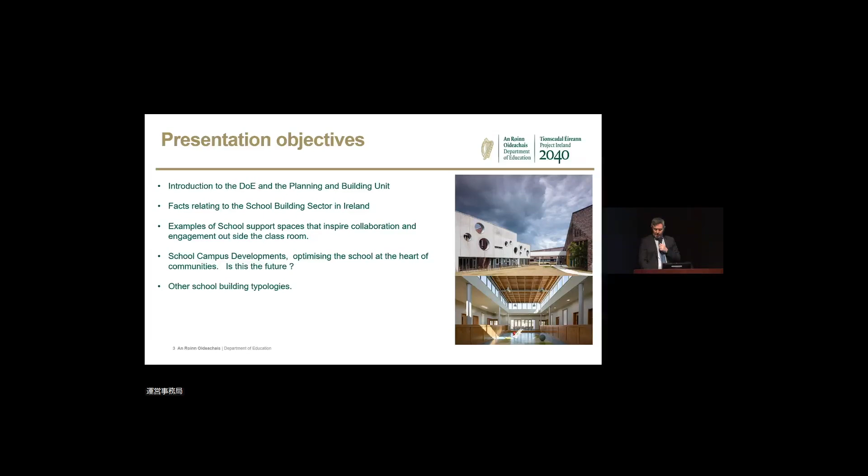Today's presentation's aim is an introduction to the Planning and Building Unit in Ireland and some facts relating to the school building sector, giving you insight and examples of some of these school projects. We have some statistics we covered a few moments ago, and the Planning and Building Unit is in the Department of Education.

Here we have an excess of 240 people, and there are many strands including site acquisitions, project appraisal, programme delivery, grant schemes and technical guidance, all supporting the Department of Education on its mission statement.

We have over 4,000 school buildings, of which over 3,000 are at primary school level, and we are adding to this greatly every year. For example, we completed almost 900 school projects between 2018 and 2022.

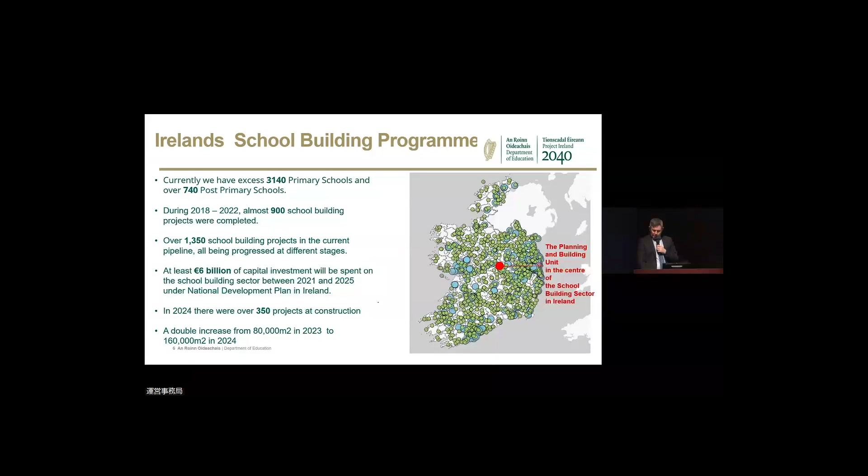We currently have over 1,350 school projects in design, and in 2024 we had over 350 projects in construction. This is all supported by at least a €6 billion investment from 2021 to 2025, and last year our budget exceeded €1.4 billion, almost double what we had a number of years ago.

The Department of Education Technical Unit forms part of the Planning and Building Unit, and it is very much at the heart of designs and projects located all over the country.

We have in excess of 40 team members in multidisciplinary teams, including architects, engineers, quantity surveyors, and recently building maintenance managers, supported by a digital team, and we support administration colleagues.

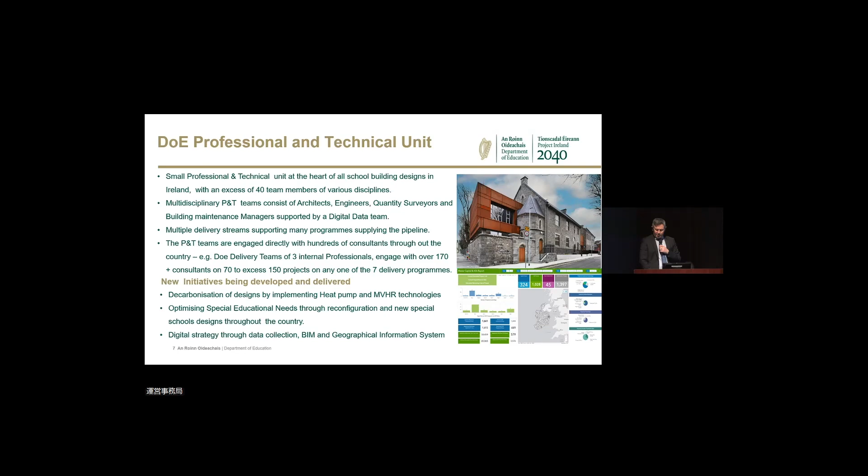To put this into context, a multidisciplinary team on one of 7 main delivery programmes may consist of 3 internal professionals engaged directly with over 170 consultants possibly, and the number of projects in a programme can vary into the hundreds. A large-scale capital programme can have over 150 projects, of which you will see many examples of school projects across the programmes.

Today we wish to show you some examples of the quality designs of architects and teams' completed projects, mainly large-scale projects, of which we have in the region of over 500 at various stages within the different delivery programmes.

As time is limited, we have picked spaces that inspire collaboration, meaning spaces to promote opportunity among students, teachers, staff, visitors, and even local community members from time to time to engage.

We have focused mainly on post-primary schools, and we wish for you to take away the quality of the spaces, the variety of design approaches, and the potential use of spaces that the school can utilise at both micro and macro level, all promoting engagement in a time post the coronavirus, which is key to today's symposium.

To start, in the Planning and Building Unit, we have design guidelines published for consultants. It's a suite of documents providing standards and design criteria for all school building types.

One key area we are focusing on today is to provide examples of a variety of design responses for the provision of the general purpose area. This area is promoted to be the heart of the school, and it needs to be flexible, adaptable, and really promote engagement, interaction, and overall space for collaboration.

It can be utilised for assemblies, student prize giving, plays, exhibitions, social events, etc. Recently we are exploring how designs can also locate this space with direct linkages to a multi-purpose area or sports hall. So I wish to present to you a few examples.

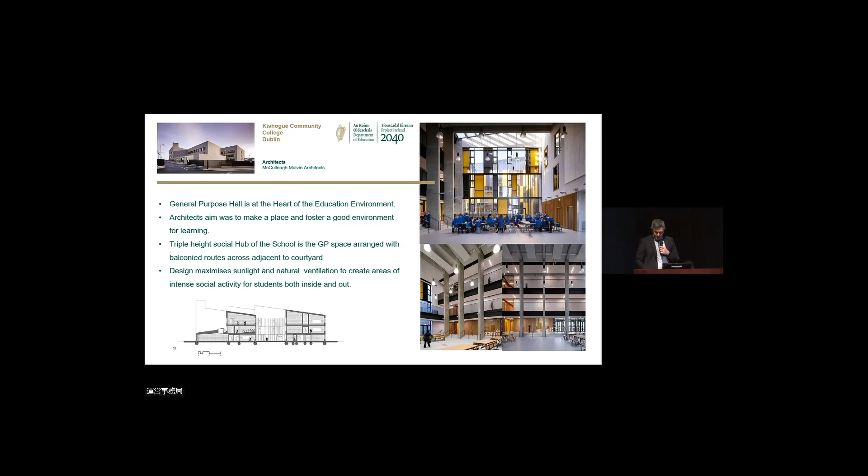The next example is a school in the Midlands, completed in 2023. This school was part of an architectural competition. It's located in a parkland setting, with a general purpose space that is well proportioned, optimising the light with direct access to the parkland.

The design also promotes additional recreation spaces at the corners of the building for use by students, as they are orientated around a central courtyard. The landscaped courtyard is a key driver to successful design, and its large multi-purpose space is the same.

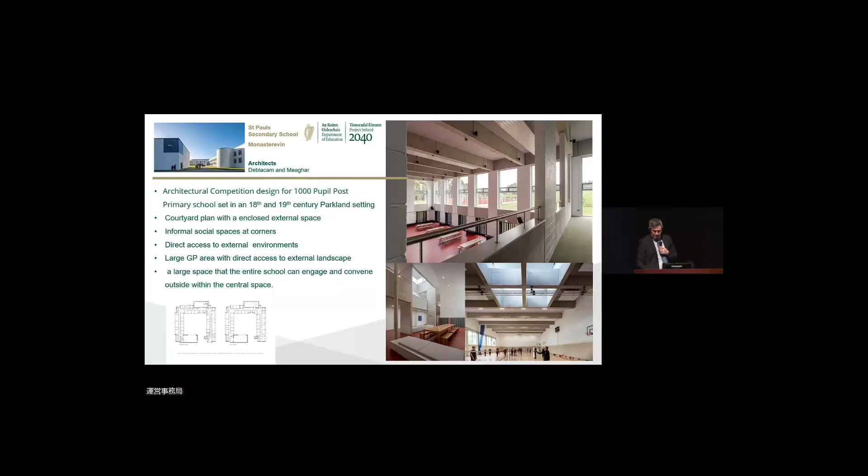The next school is in Naas, County Kildare. It is also a competition design, where two wings and a sports hall are arranged around a GP area. It incorporates tiered seating to promote space for collaboration. The design of classroom wings is also supported by provision of spaces with soft furnishings and seating located around the school for the users.

Our next school, completed recently in Limerick City, builds again on a double-height GP area and separate large multi-purpose room. However, in this design, it includes a circulation spine connecting a series of educational support spaces on the first floor. The circulation is external and provides elevated views to the courtyards and the park, while the students get the benefit of the external environment.

This example in Kilkenny City combines many successful attributes. The triple-height atrium space connects 4 wings, provides great access to the external landscaping areas, and is also connected to horizontal circulation support spaces such as the library.

The tiered seating will be sure to be a great success once this space is completed. It is currently in construction.

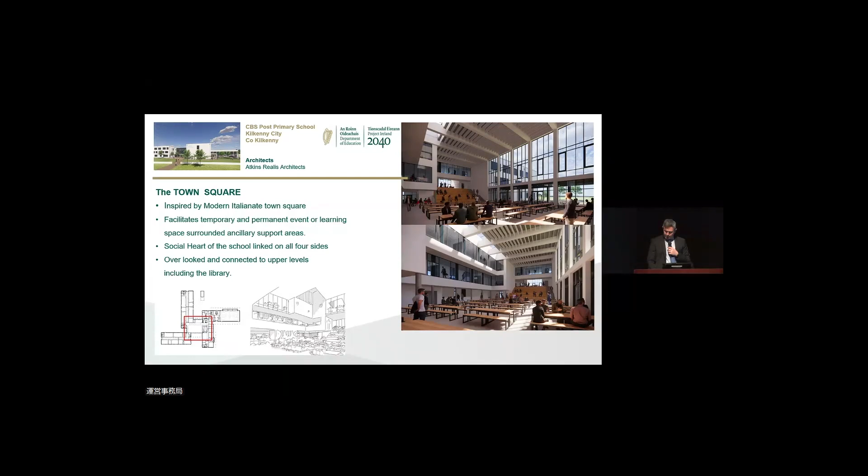The next school example pushes the design approach slightly further, as the GP area is connected to the multi-purpose room, separated by large sliding walls. Its aim is to optimise the use of both spaces. It really opens up further use of this space for the local community, particularly for activities outside school hours.

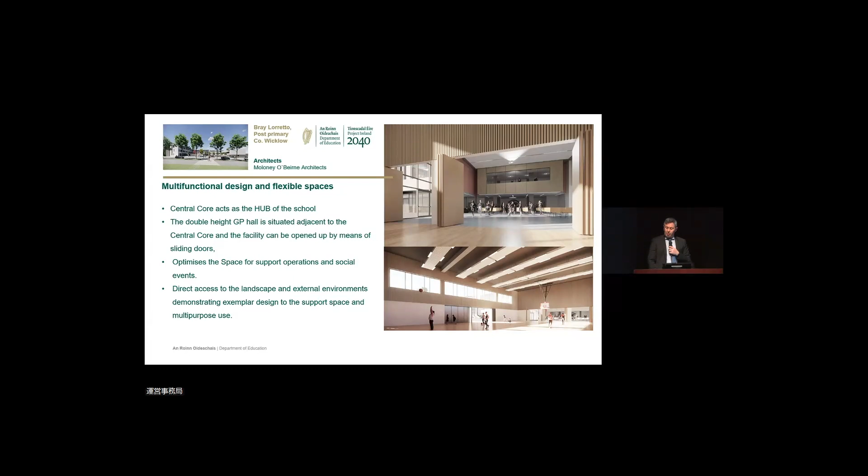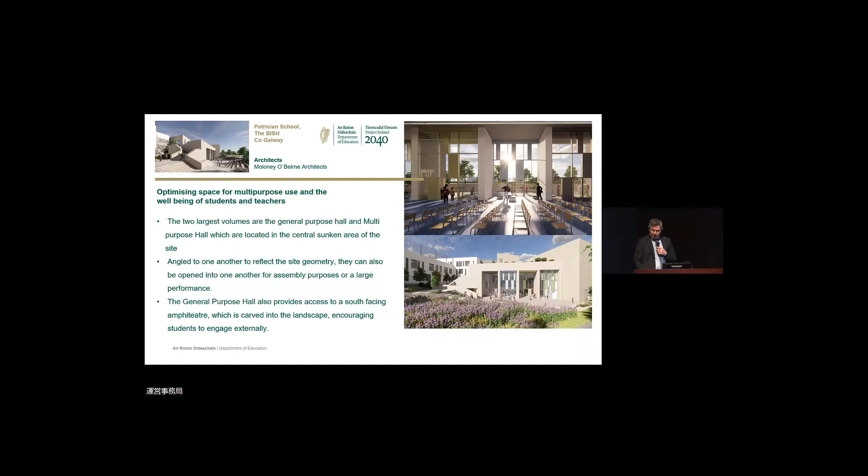The next space builds upon this again, and the same architects have built an approach linking the spaces to an external amphitheatre. The landscape amphitheatre provides further opportunities to congregate and respond successfully, as the stepped site again provides further spaces for engagement outside the classroom.

Now we're moving on to campus projects. We feel that these projects demonstrate collaboration, the sense of schools coming together, providing a strong nucleus and opportunity for communities and surrounding areas. This is an example of an educational project that consists of a post-primary and 2 primary schools, incorporates special needs, and is very much a key catalyst to public infrastructure in the local area.

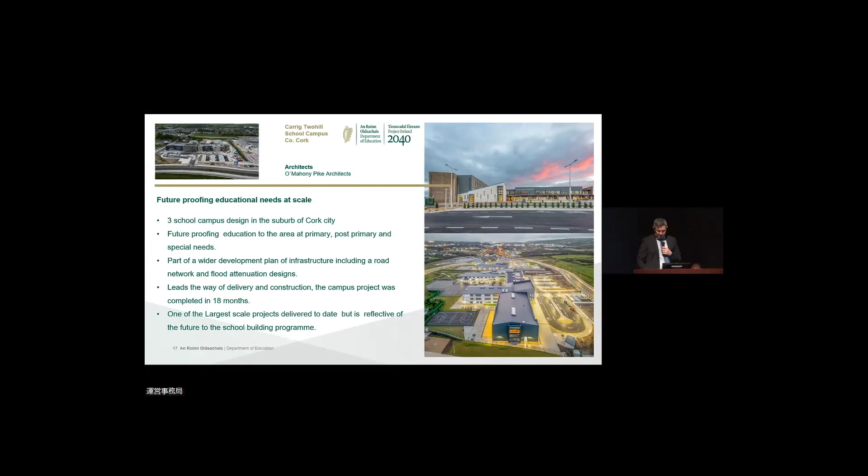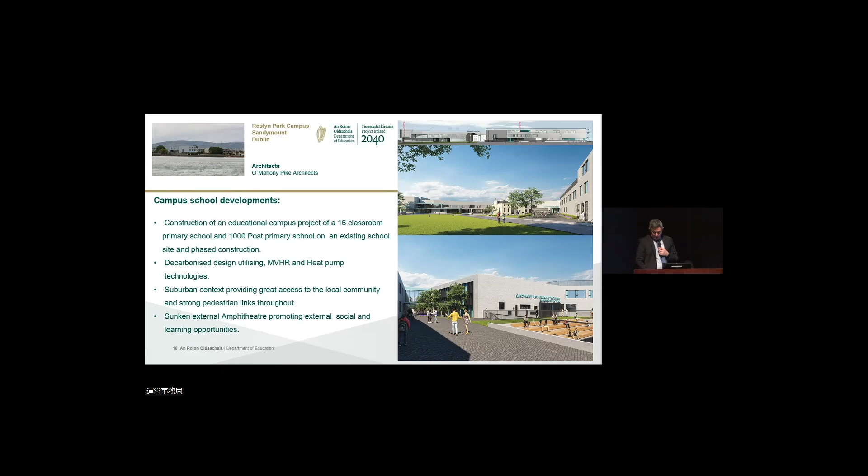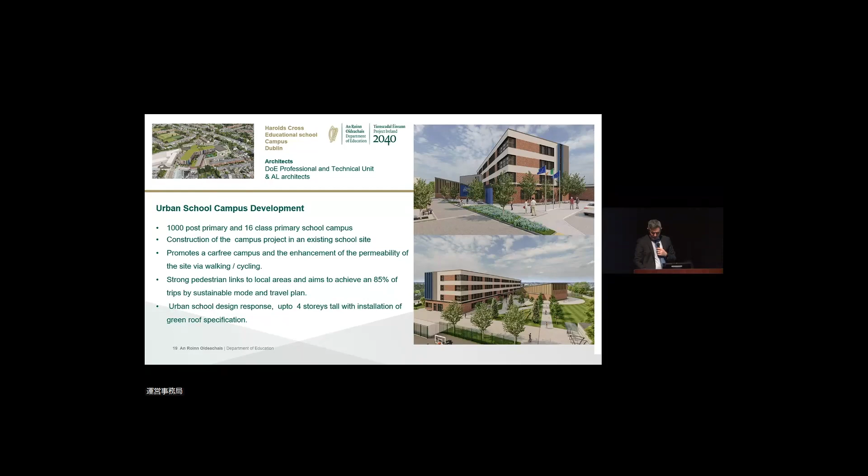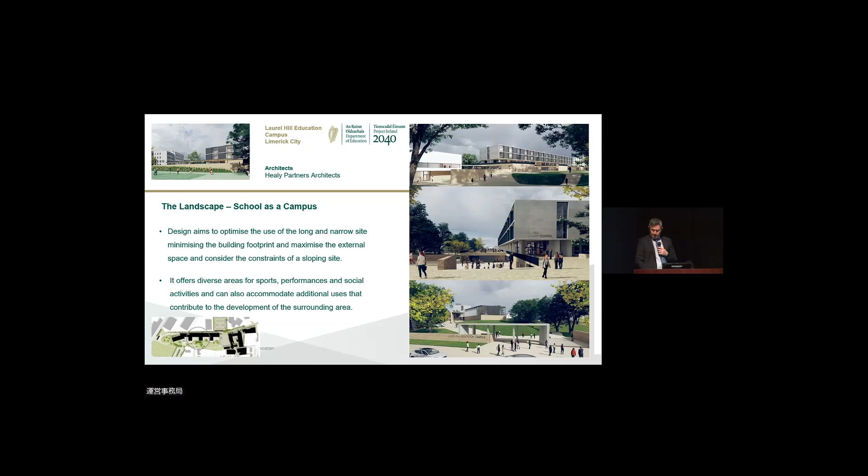Our last campus project, Laurel Hill, is currently in design stages. The design response illustrates how the architects have successfully created a merging of landscaping and educational buildings, with provision of a sports ground, in a very successful response on a narrow and challenging site with historical linkages and buildings.

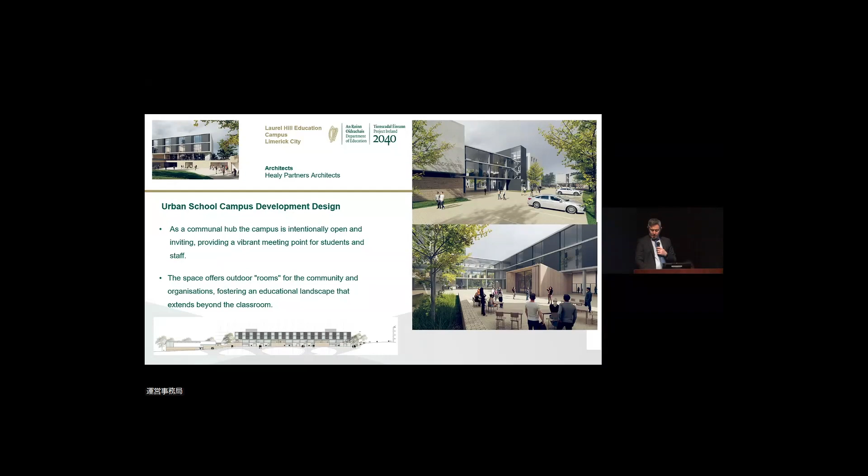The architects are aiming to create a campus that will react as a communal hub, designed intentionally to be open and inviting. These spaces will be a great addition for the community on completion in a number of years, fostering an educational campus within the city centre of Limerick.

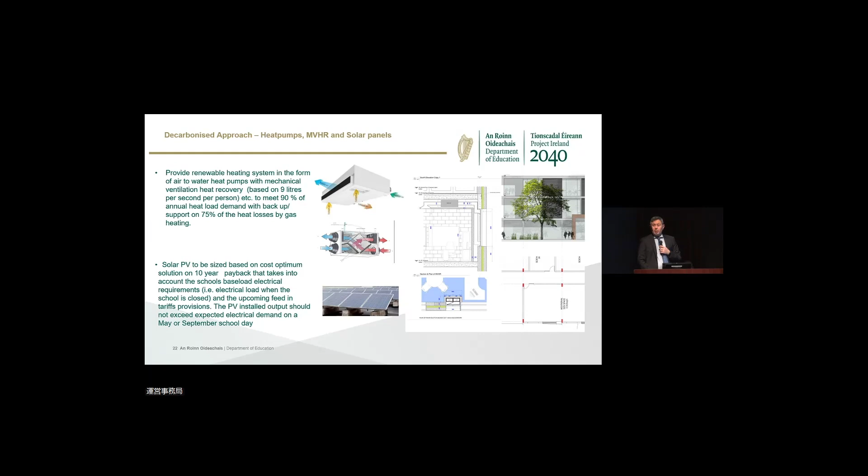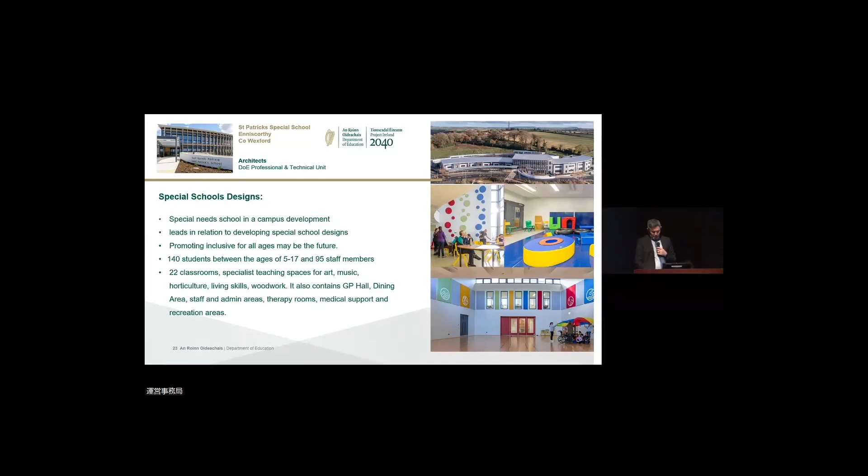As you can see here, this is an example of where we also bring collaboration for students outside the classroom, and this is an area that we will continue to strengthen and optimise going forward as we explore this even further.

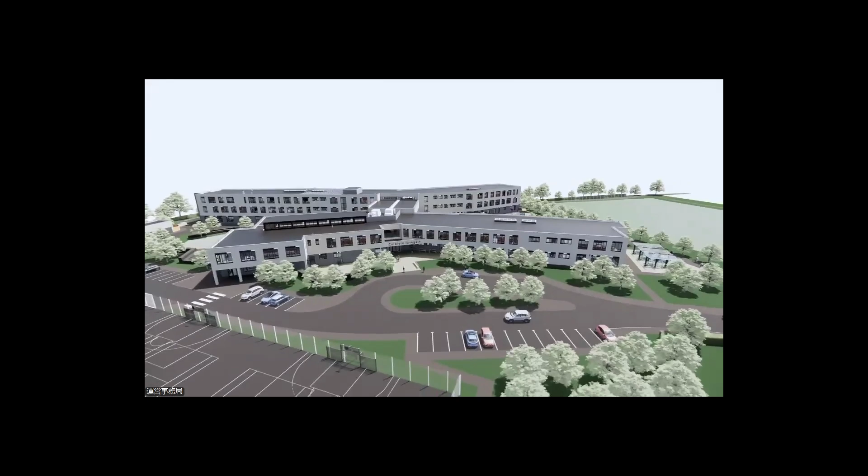So this project is on a semi-rural site in a town called Portarlington, about an hour from Dublin. 1,300 pupils, as I say. It has two spines, you can see. So the design concept is a 2-storey and 3-storey, linked by a central block, and courtyards between them, which give protection from the weather. So landscaping and biodiversity is a very important part of our design.

And you can see here just some of the external teaching spaces and recreational spaces for the pupils. And you can see, for instance, the solar panels on the roof, and the way that the courtyards protect the pupils. So as you come round here as well, you can see the coloured area is the special educational needs dedicated physical area.

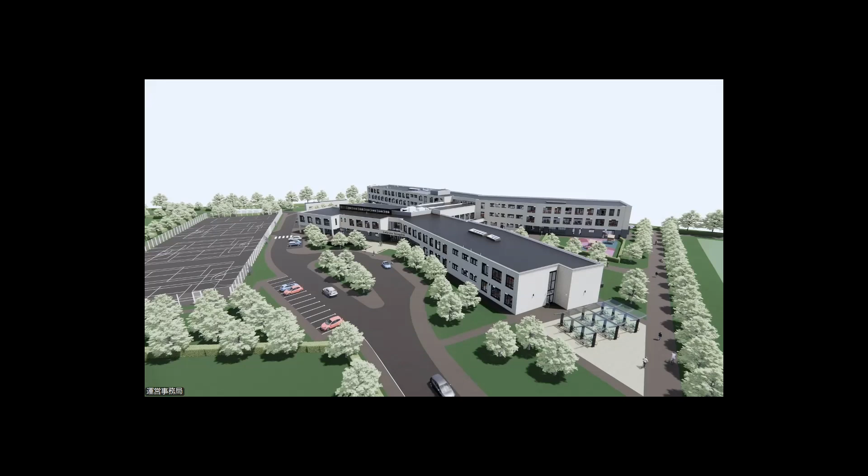The integration of special needs into mainstream schools is very much a policy with the Department of Education, and inclusivity and diversity is very important. So this model was built using BIM and Revit, and we have a process of digitalization of our projects.

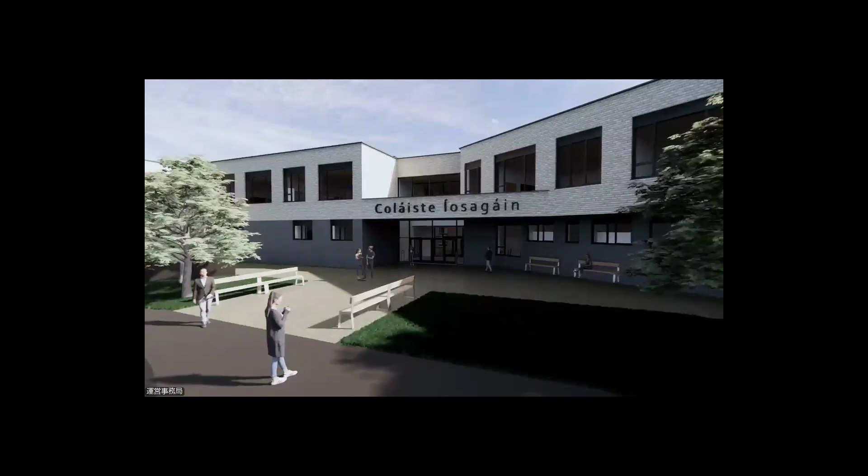So now we're going to go into the building. So this is the main entrance. We promote active travel and arriving by bike. So you come into the main entrance. It's very well signaled, but at the same time safe and secure. So there's a control point, and you come straight into the heart of the schools.

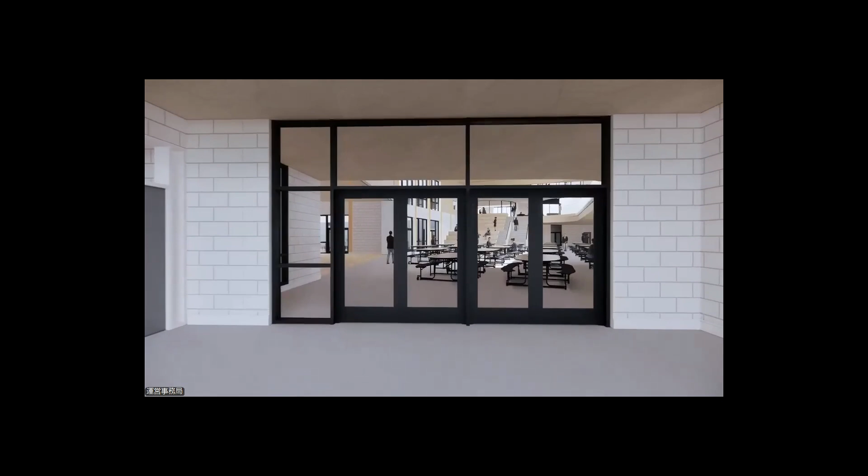This is what we call the general purpose dining area, and that connects over here to the PE multi-purpose hall. Another feature of this space is the use of glulam structure, and the whole question of sustainable design, low embodied carbon materials is very much part of what we do. And you can see the quality of the daylight.

So this space is also available to the community, and you can see the folding partitions, so the space can be closed down from the other space. So we'll come back out here now into the central space.

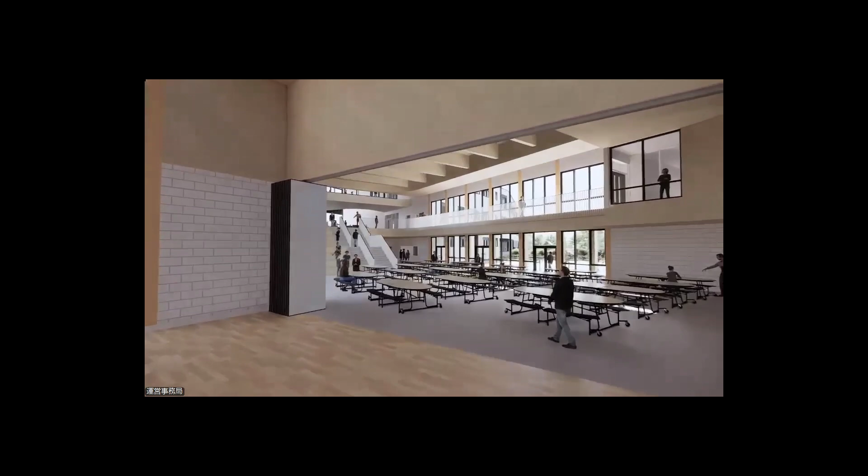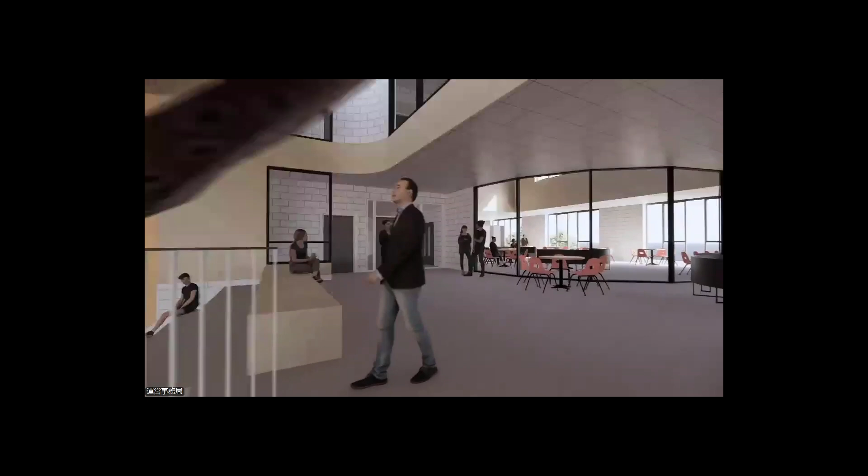So this is very much about creating a stimulating and inspiring space for the students, and a space to collaborate and have creative learning. You can see the tiered seating, which allows teachers and students to interact in a more informal way. And then you come up to this space, this is what we would call a breakout or social space. Again, it promotes collaborative learning and social interaction.

Then you have the spines. We're going to move down the corridors. So obviously the quality of the daylight and materials and colour in these spaces is important, but at the same time they need to be functional and durable and cost effective.

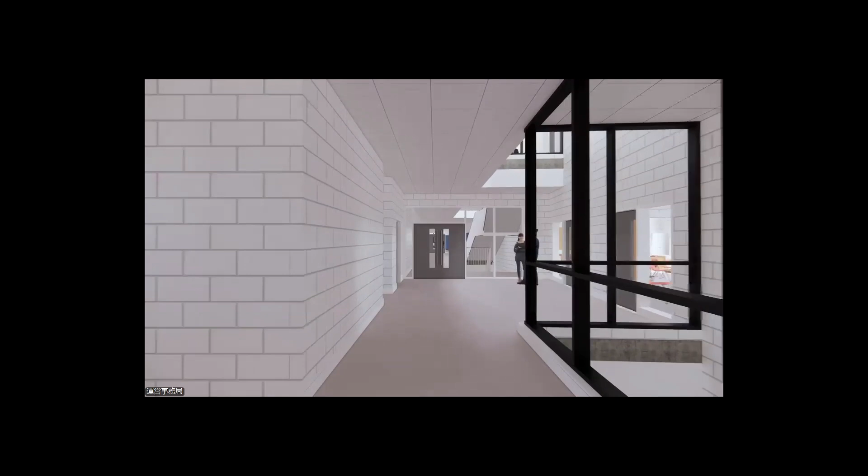And you can see the voids which bring light down to the lower spaces, and also the glimpses into the classrooms, providing passive supervision. So then we'll go up the stairs up to the upper level, and again you can see the connection with the vertical spaces bringing light down below.

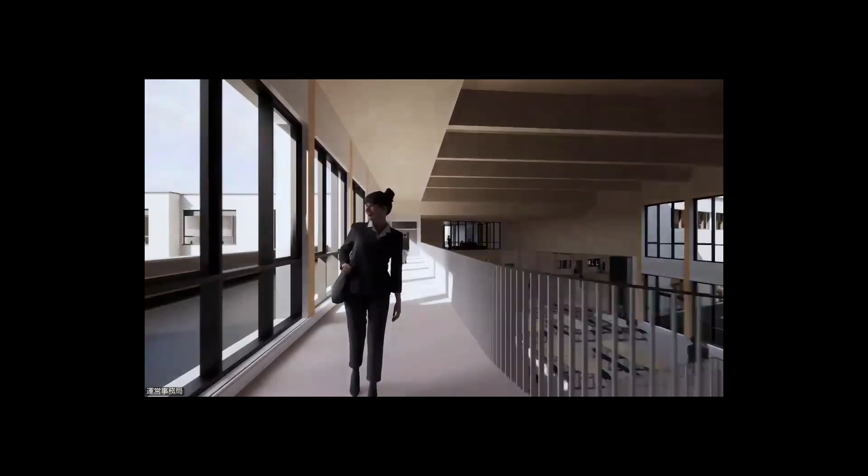This is a gallery link back across that central spine, looking down into the central space. That really orientates everybody in the school to the central space, and it's a very dynamic and open and welcoming space.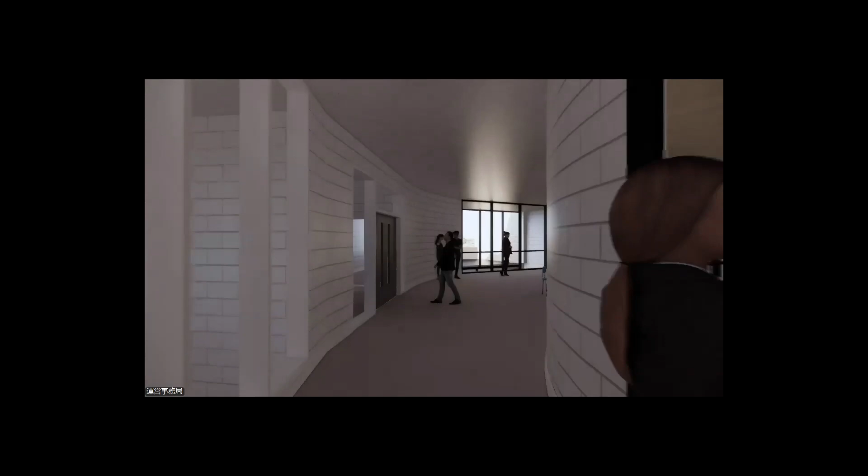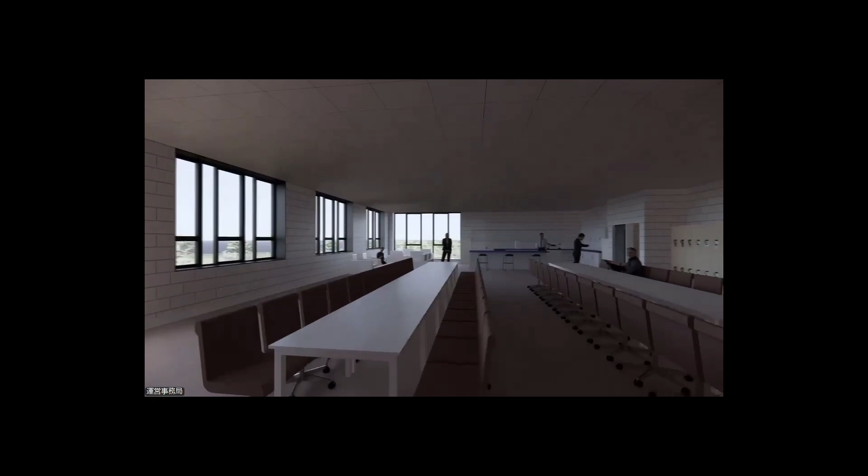Again, coming back up into another collaborative area, and you can see the use of laptops and IT technology is very important. This is the staff room, where the staff can work but also have relaxation. It's a bit of an area for their refuge, but at the same time they have connection. They can also work in their pastoral offices and also in the classrooms.

You can see the connection back down to the double height space, so everything is orientated around that. In our school designs we also prioritize all the performance standards in terms of acoustics and thermal performance, and these are all given in our school design guidance.

I went through that very quickly because the time is short, but I look forward to discussing it a bit more later on. So thank you very much.

Konnichiwa. My name is Tony Sheppard. I'm an architect. I was a technical manager in the planning and building unit up until nearly 3 years ago. I also had the privilege and honour of being the chair of the group of national experts in the OECD.

I'd like to talk in the next few minutes about this design competition which we had in 2015 and the evolution of the brief for that concept. But I believe the most influential architect in my mind on educational design in the 20th century has been Herman Hertzberger, and you can see a statement he made at one of our OECD events there.

I won't read it, you have it in translation. But moving from that, as an architect, I worked very closely with educationalists within the Department of Education on comparing a standard classroom with innovation worldwide.

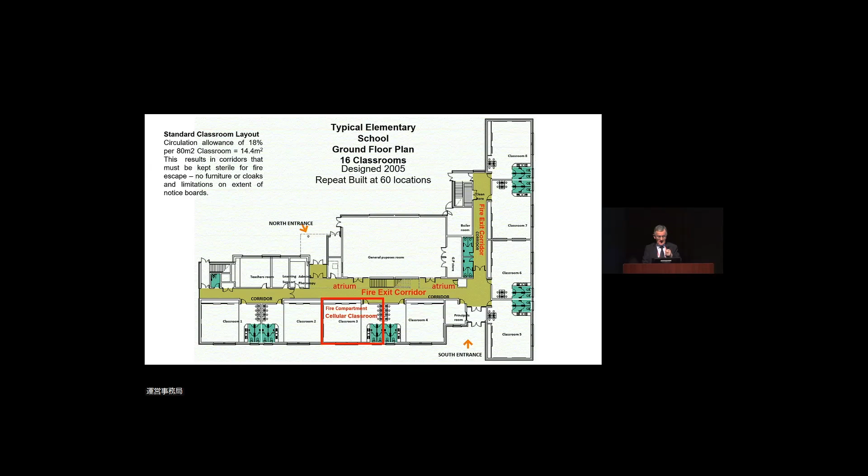You can see that the cellular classrooms and fire exit corridors or circulations. This was a standard classroom. The standard classroom has a lot of functions within it. There was fixed computers with hard wiring, and that has moved on to Wi-Fi.

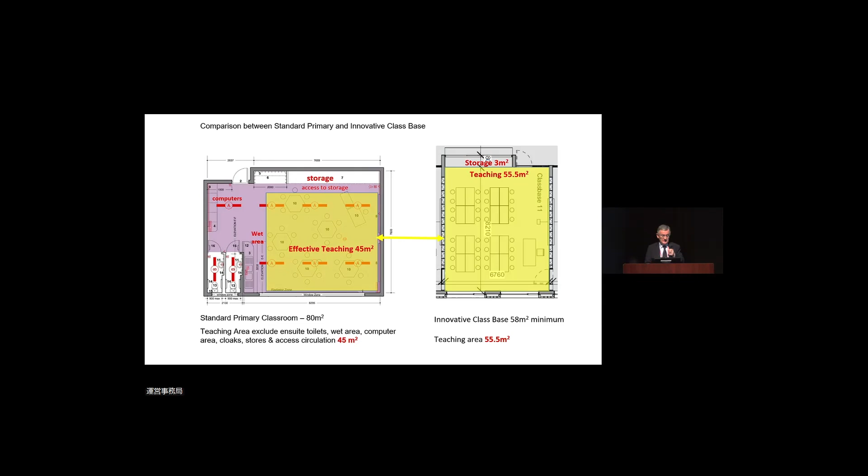So we looked at the effective teaching area. It was only 45 square meters. So we looked at taking all those elements, the wet area, computers, access to the toilets out of the classroom. And we had done a very detailed exercise.

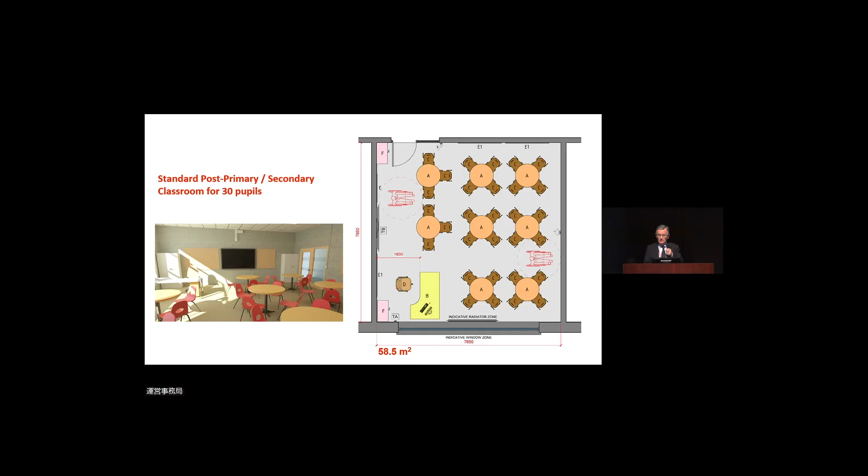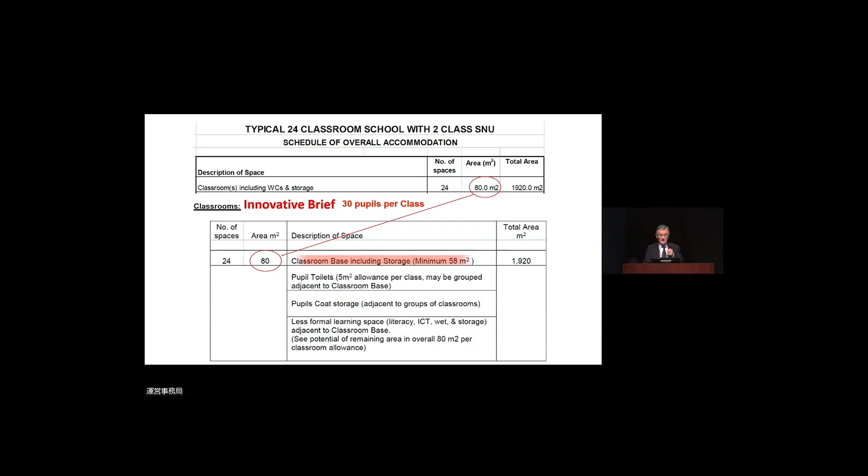Post-primary school classrooms and disabled access and ergonomic design so you could have group settings. So we developed up this brief. We suggested that the 80 square meter cellular classroom could be broken down into a number of elements of a class space and then informal learning.

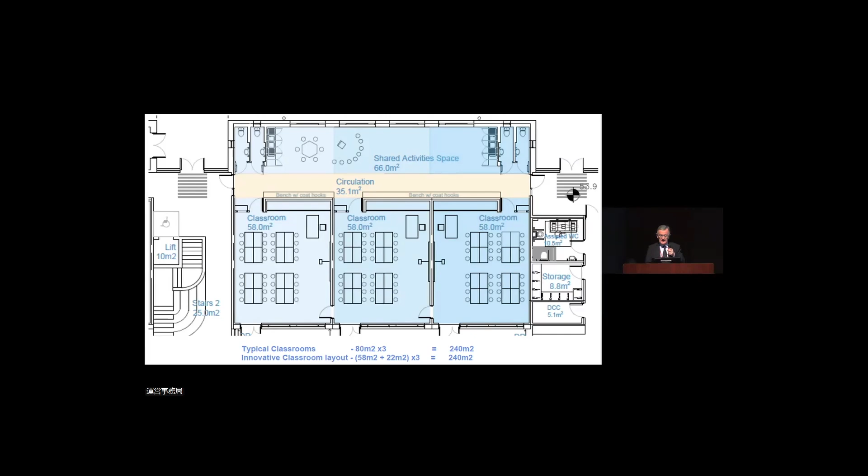We had the privilege of being in Finland, and I know Reino Tappanen, the chief architect in Finland, was here a few years ago presenting to you, and this was a wonderful school we encountered. Taking that school and the concepts behind it, we then evolved to look at this in greater detail.

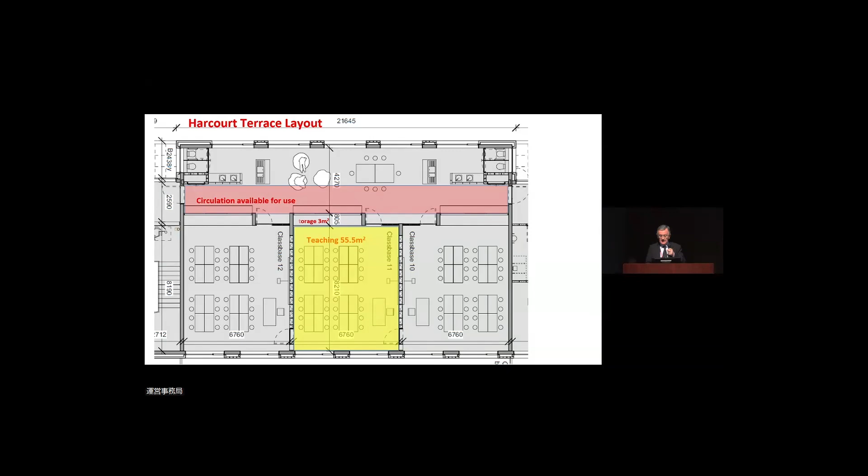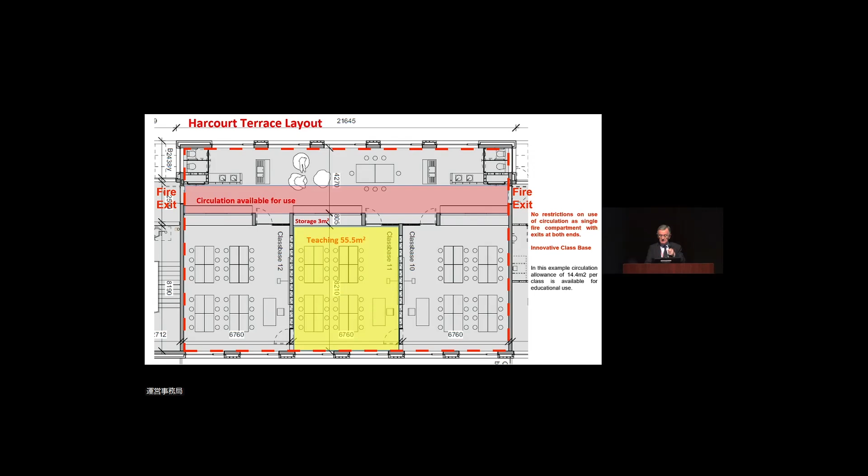The circulation area, which previously was used solely as a means of fire escape, is now available for education use. You can read the text there, but there was a great gain for education rather than merely narrow corridors. So you have a copy of this detailed pedagogical brief.

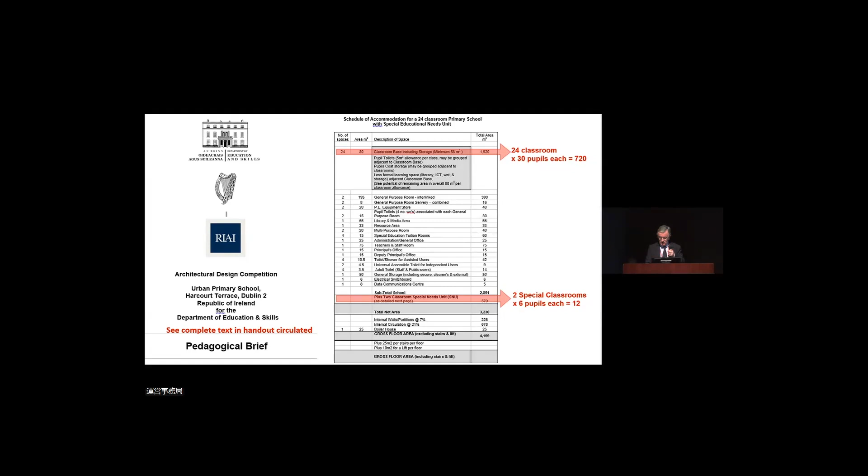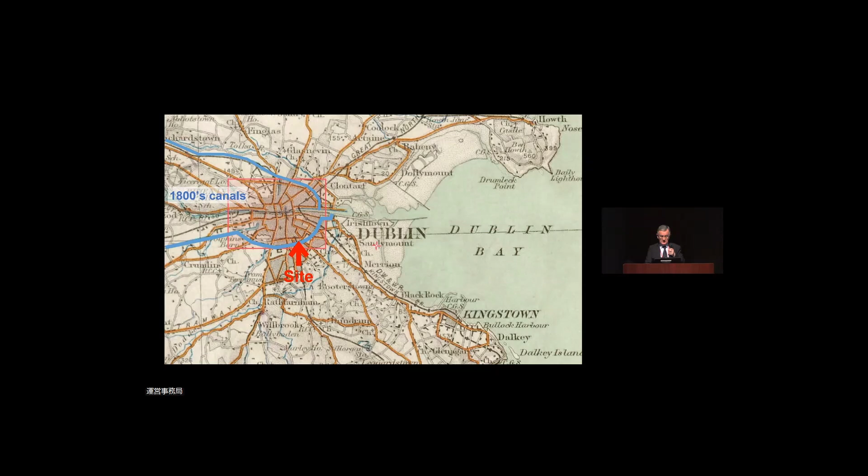This school is for this size. In Dublin, it's a city of 1 million people. It's by the sea, and this is where the site is located. It's in the inner city of Dublin.

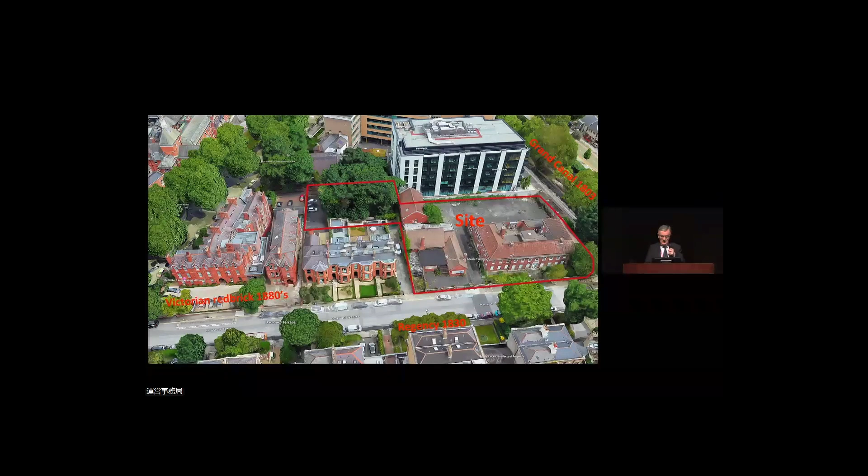It has a historic canal nearby, and it was previously a police station, with very nice 1830s buildings. Here's a view of the site from another angle. You can see very large office buildings nearby. The area is being redeveloped.

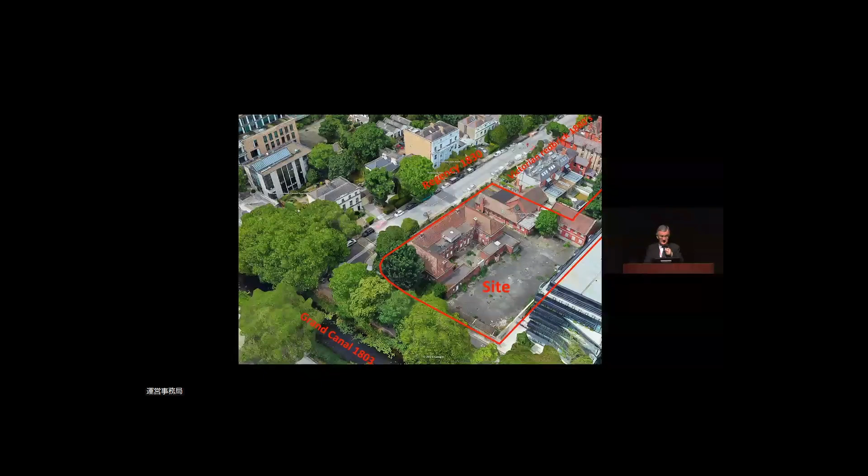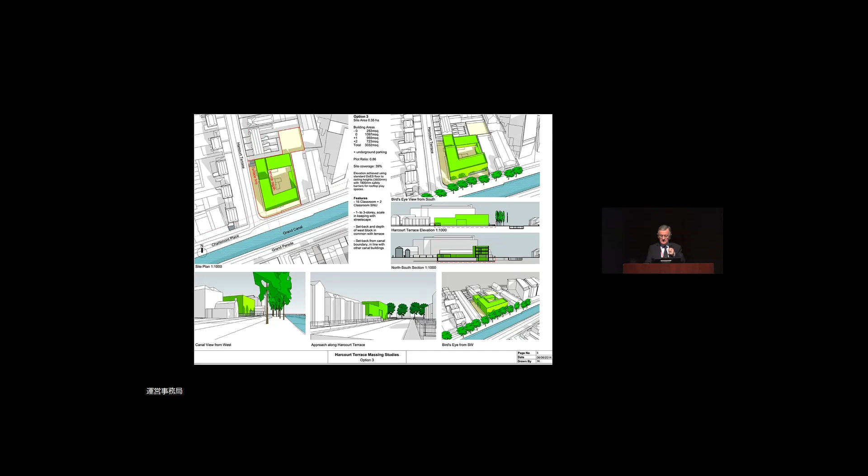Within the department, we had undertaken a number of models on what we could build on the site. Initially, there was only going to be 16 classrooms, but we decided it could take a 24-classroom school. So there was an international jury, and we had a past president of the UK RIBA Architects on the jury.

There was a principal teacher, and a principal teacher from Finland. So we had a broad range of expertise evaluating the projects.

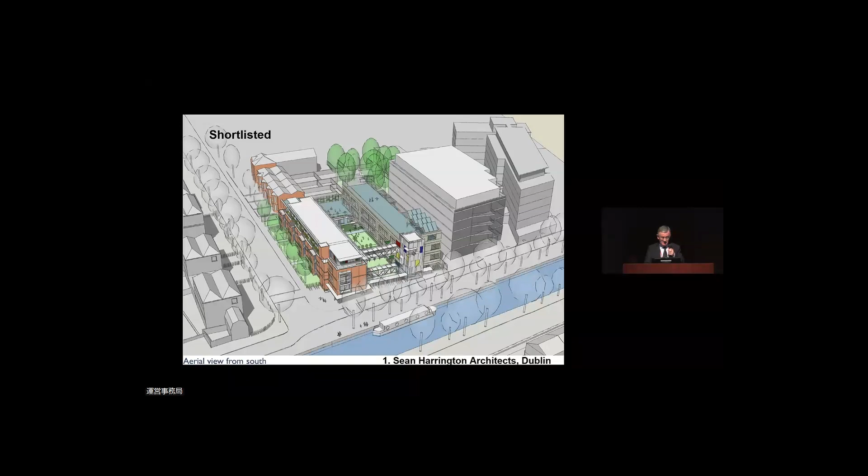I'm going to show you 4 of the short list of projects and then the winning scheme. This architect has done very fine work in Dublin.

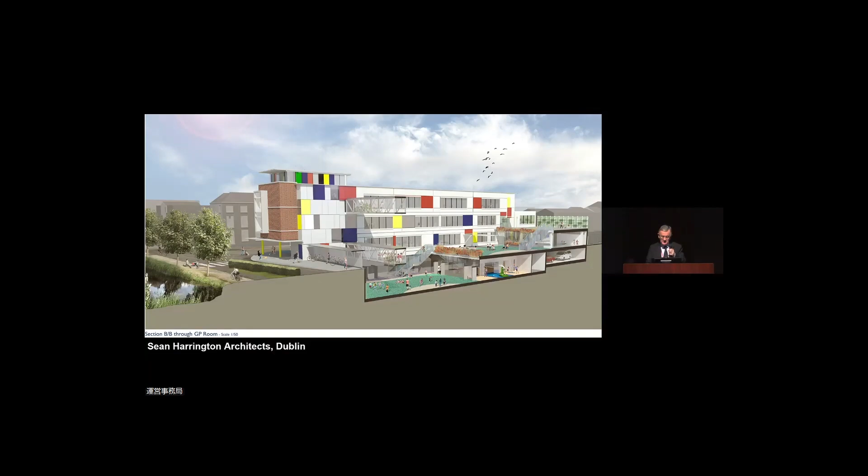You can see the beautiful rendering he had made. He has built a number of pedestrian bridges, so he's a very fine architect. The project was wonderful in many regards. It was perhaps a little bit too complex in the internal circulation, but he had addressed the issue of informal learning spaces outside the class space, as you can see on the right-hand side.

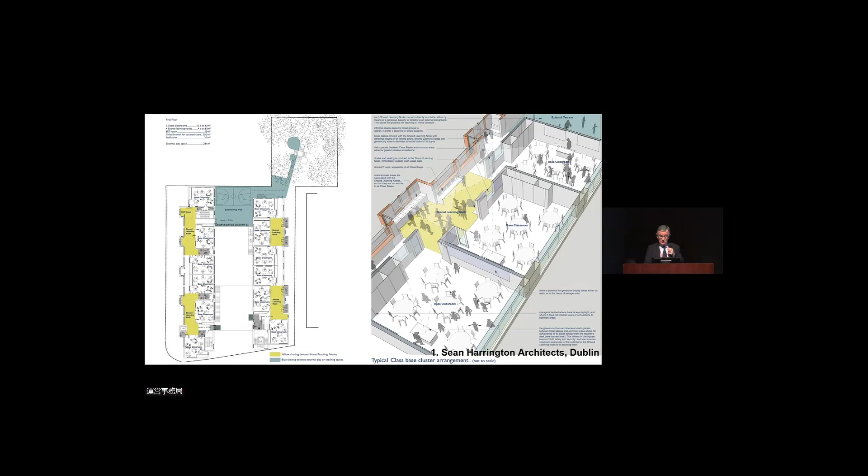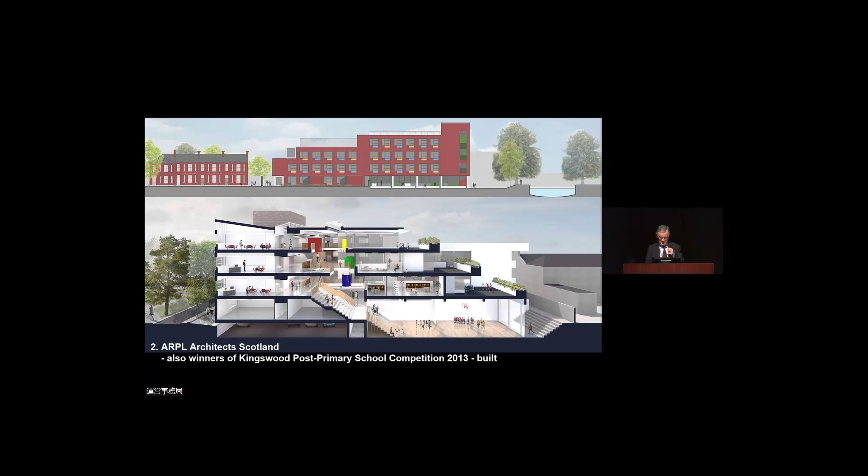This architect from Scotland—a number of your colleagues here had the pleasure of visiting this school two years ago. It was actually built; the architects had won the Kingswood post-primary school competition. So they're good at coming close to winning competitions. This again was a bit too complex.

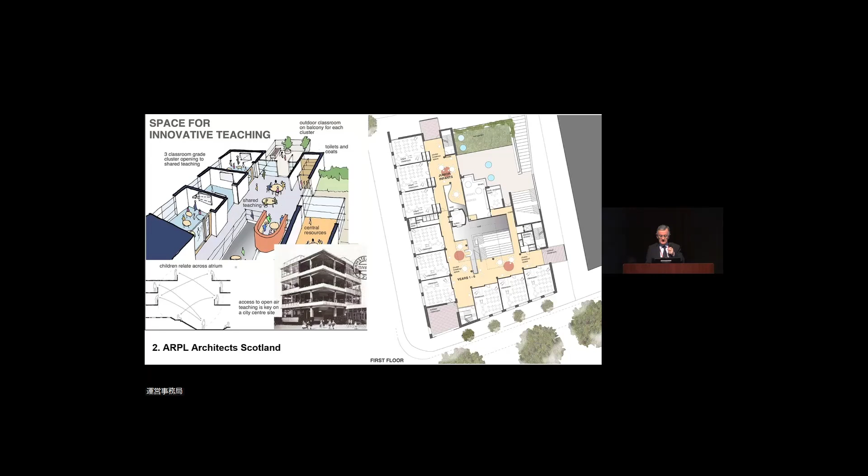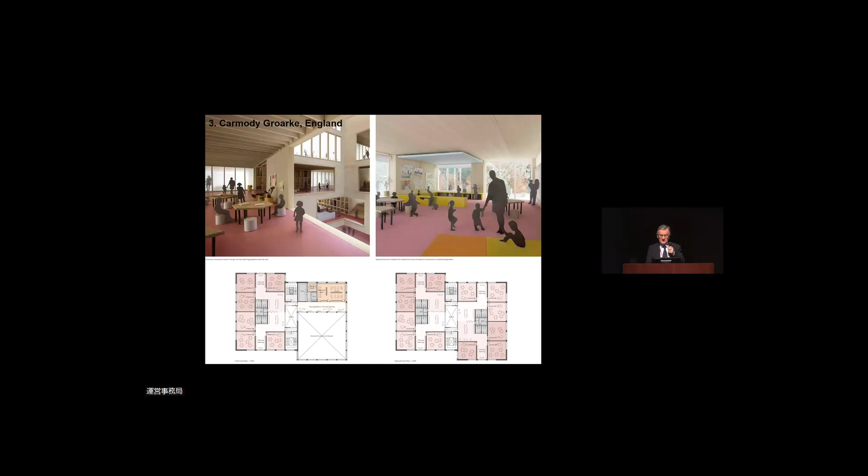Great references to the open air school from the early 20th century. UK-based architects were proposing to build the building entirely out of cross-laminated timber. Very fine renderings beside the canal, and its image on the street. You'll see this was another scheme.

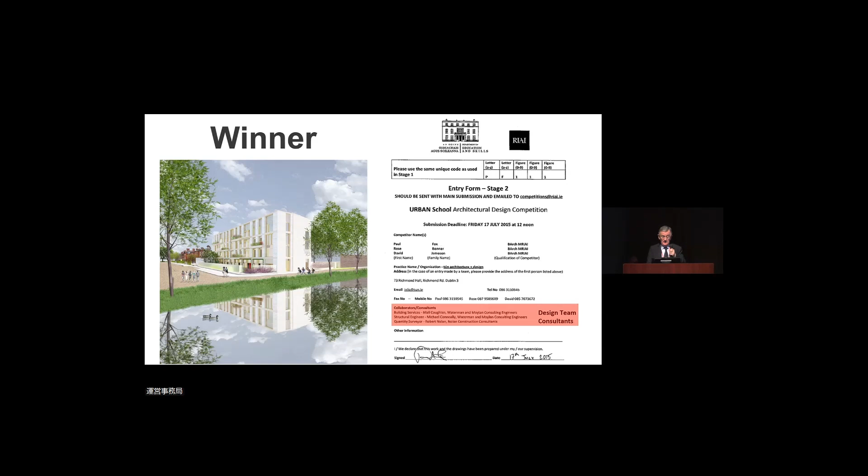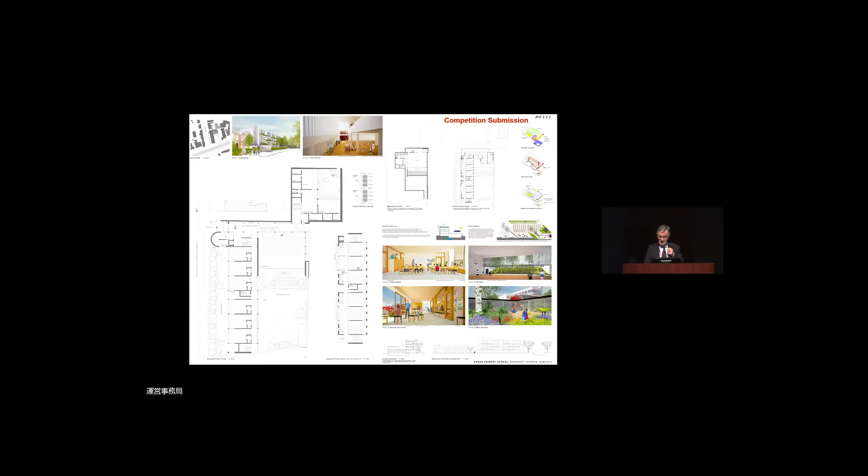Now, the winning scheme was won by a young firm of architects, and this was their competition submission board. We then shortlisted five and offered them a small amount of money to develop their concept. You can see the three young people on top—they were only 31 or 32 years of age when they won this competition. They have become wiser and grayer in the meantime.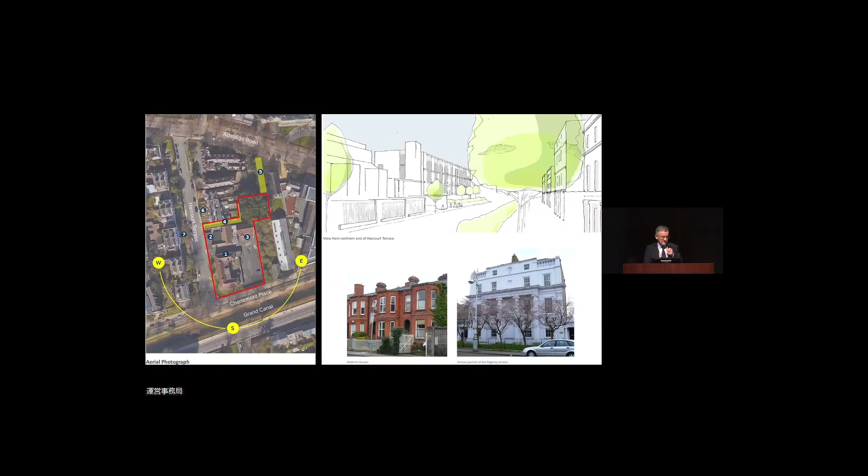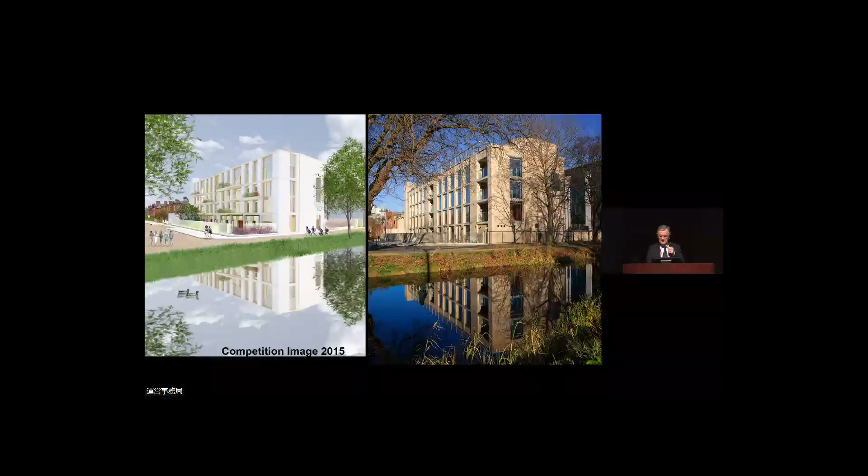So their analysis of the site was very, very good—I'll leave you to review these in the handouts. This was their competition image, and this is the built reality. They had to submit it for planning permission in 2017, and then this was the images and the built reality, which is very close to the concept. I think one point about competitions is to bring a strong concept all the way through to completion.

That was an architectural rendering, and thanks to Canon lenses, tilt and shift lenses, I was able to take this photograph of the built reality, which is very close to the concept. The cost was 19 million euro—Ireland is one of the most expensive countries in Europe for building. You can see the total floor area, and then from across the street. The entrance is there at the bottom left.

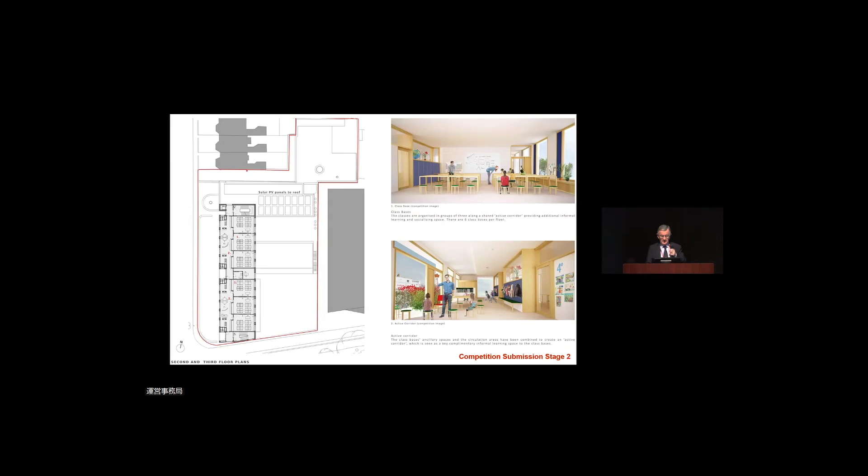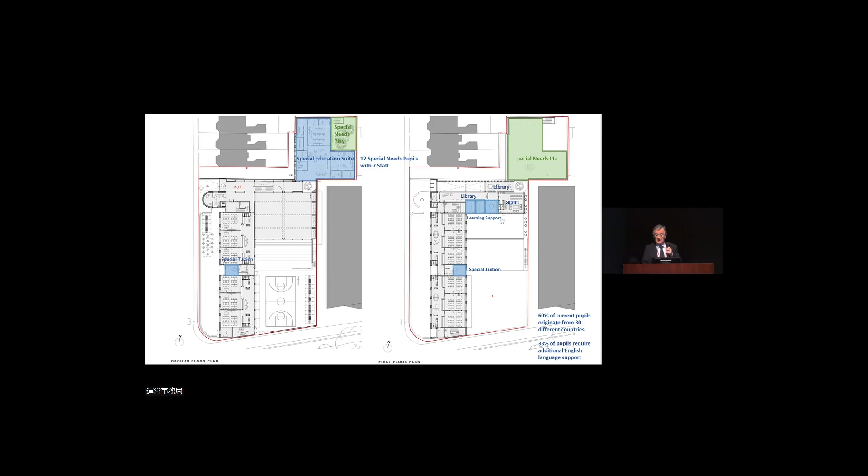This was their submission board at stage two, and this was the built layout. You can see the special needs suite and then learning support. 60% of students originate from 30 different countries. A third of students require additional English language support. And you can see the play areas.

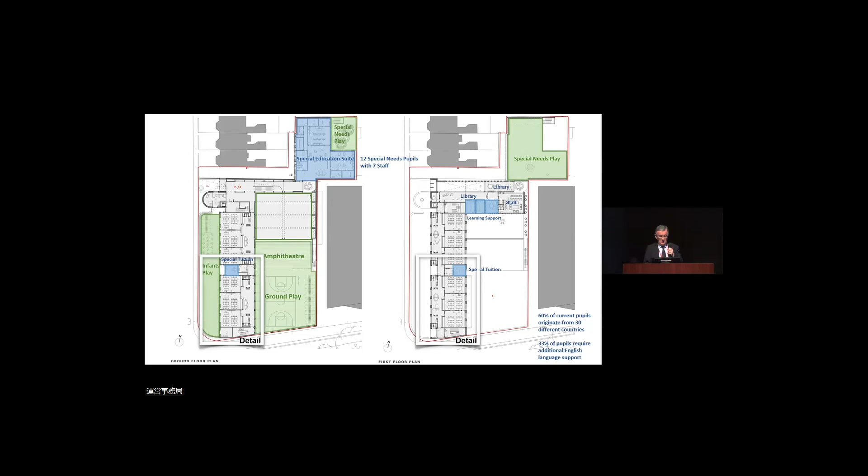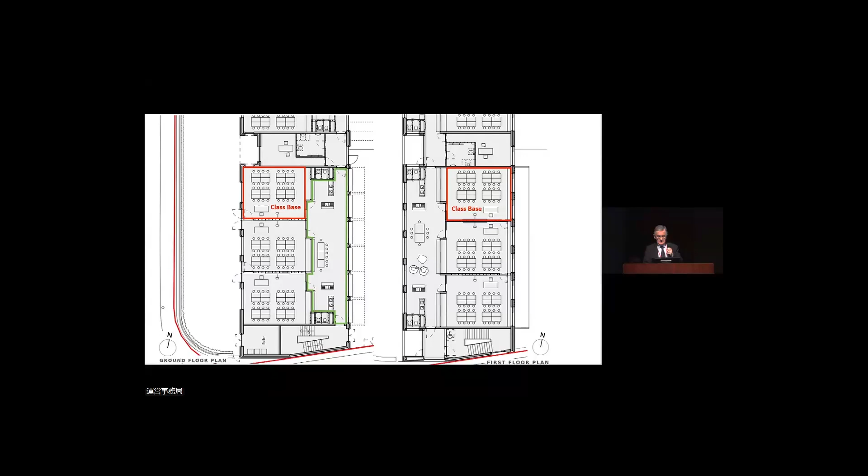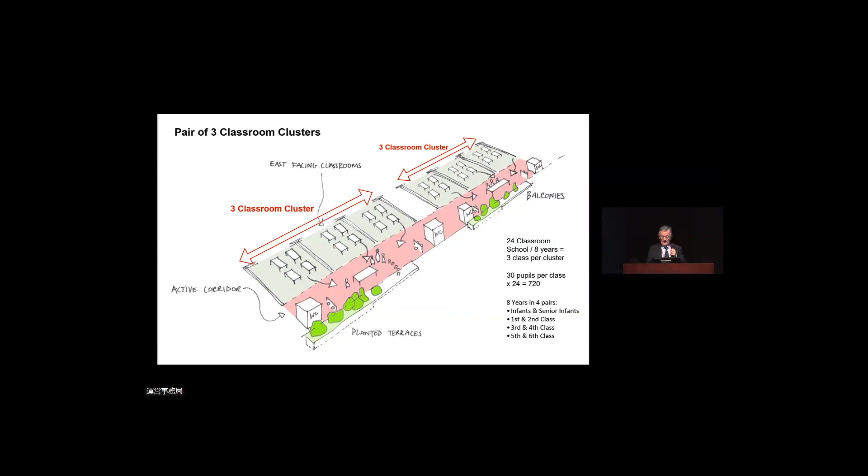Different colors on different floors, for young children. Toilets—it was thanks to my visits here in Japan that I encountered the concept of the wash-hand basin outside of the toilet area. This layout responds very well in a post-COVID situation as well.

There are some very young children, so play is an essential part of the learning process, and they have plenty of room and safety to undertake that.

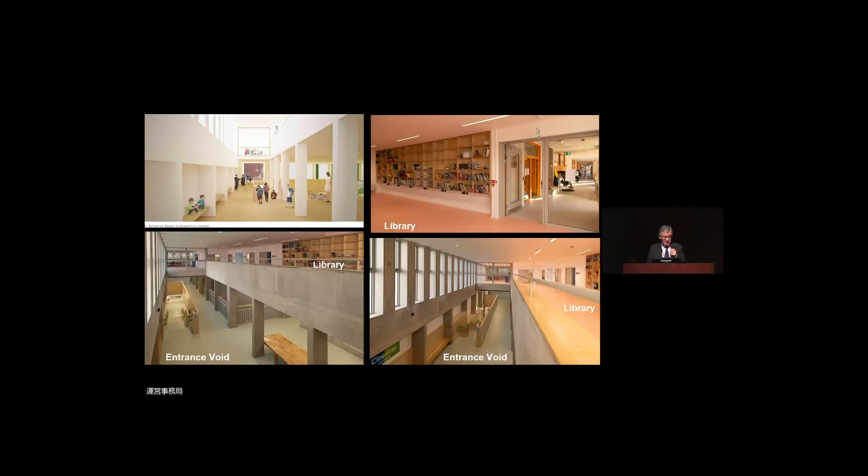Just a few images of the entrance area and the connections between floors. The library, which is centrally located—the school has just been opened last September, so they're still building up their library, and furniture is not there yet. But it gives you an idea of being an inner city school.

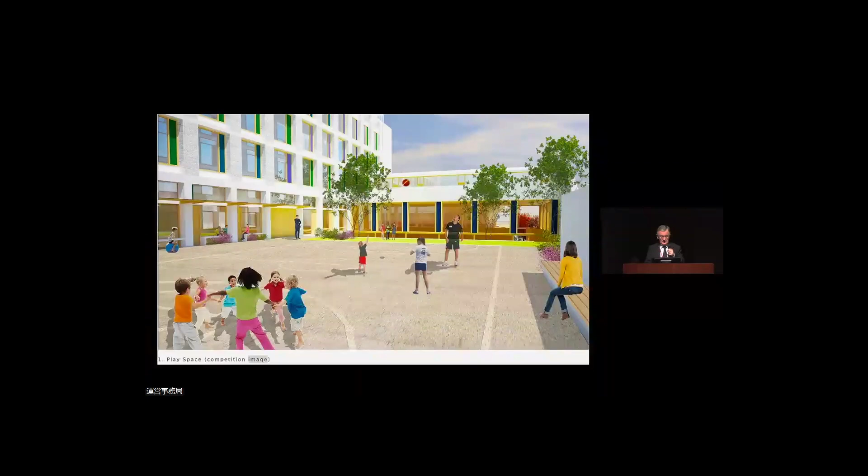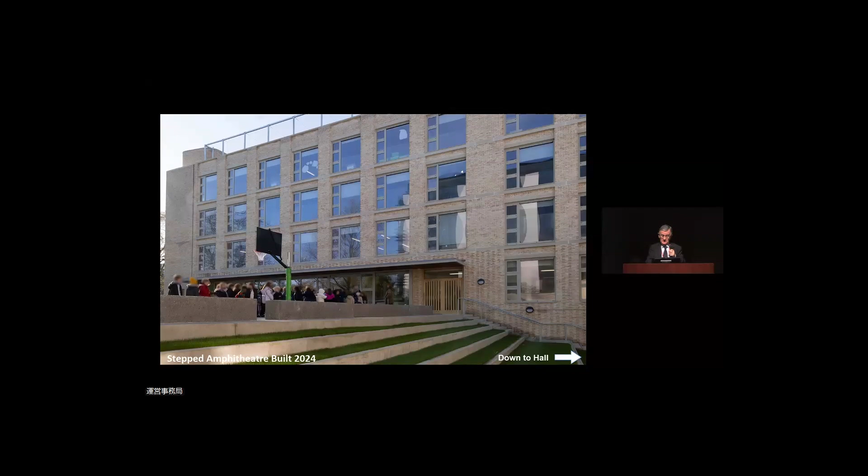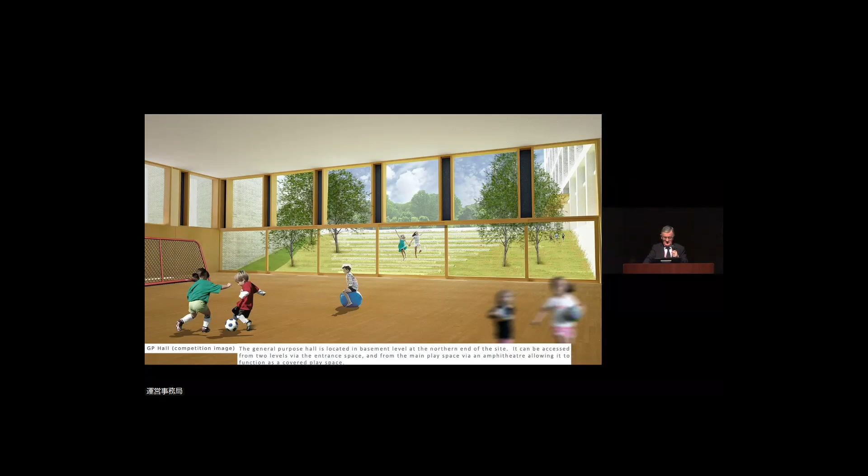A covered area for all the rain we get in Ireland, and there's an amphitheater in grass that steps down into the hall. That was an image dating all the way back to 2015, and the reality ten years later is this building.

We were able to subdivide that large space by a simple curtain, which gives some acoustic separation. There's the hall in use. So, apologies for running over.